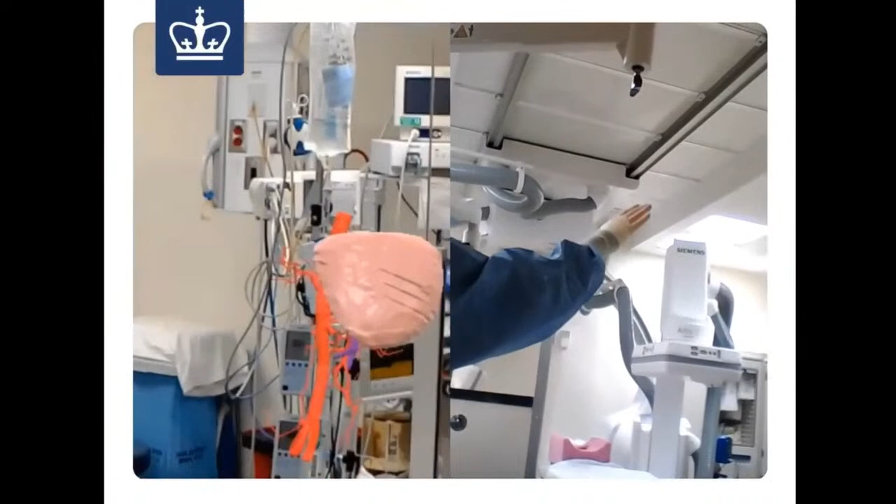Another example is actually something that our CEO Alon created for his thesis project over at Columbia, where he took MRI scans and converted them into 3D models to actually assist with surgery.

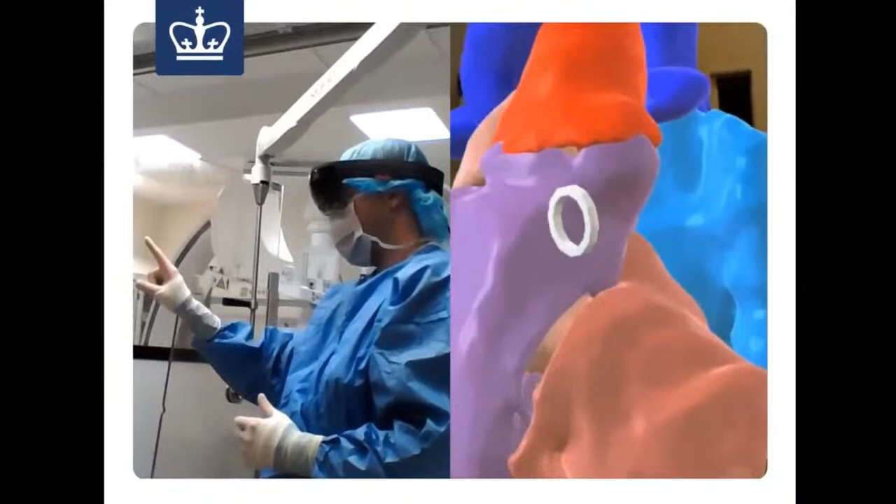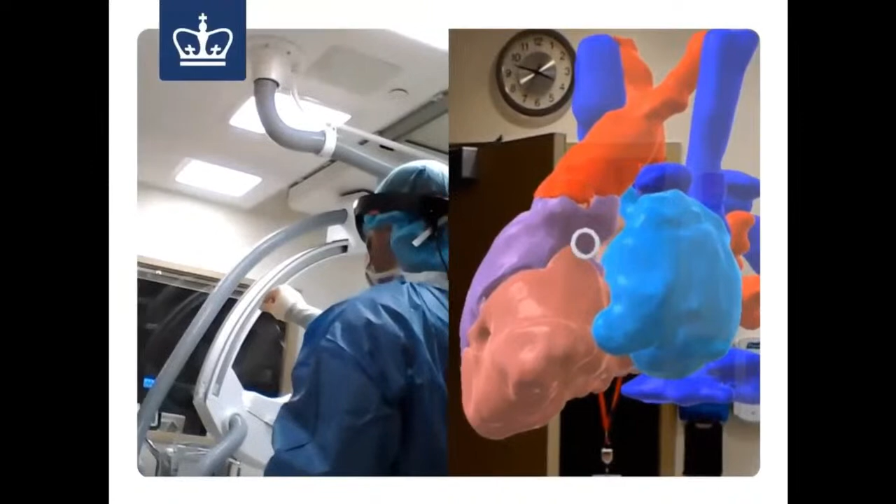The physician would put on the smart glasses, the HoloLens made by Microsoft, and the physician was then able to see the heart floating above the patient and interact with it. The physician was able to get a 3D reference of the patient's anatomy in real time. This is a perfect example of augmented reality being used in a serious industry that could truly save lives.

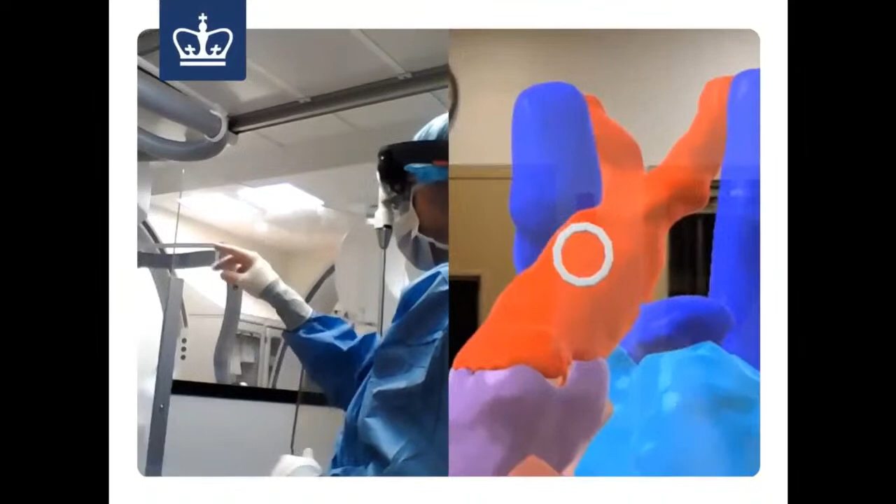So while working on this project, Alon was getting a little bit frustrated at how cumbersome and time-consuming it was to have to get all the scans, upload them, convert them, store them locally, be limited to making changes locally, and so on. All he really wanted to do was just deliver these 3D assets to an AR device remotely in a convenient way that didn't require him to wake up super early to get into the actual facility to get this done.

This inspired Alon to start talking to other people to see if other developers had the same issue, and they ultimately came to the conclusion that it was very difficult to deliver 3D content regardless of what it was, whether it was an AR experience or a VR experience. There really wasn't a way to consolidate everything on a back end in a central place.

With 2D content, there's really no problem. For web, there's Heroku and a few others. For mobile, there's Firebase and Parse, to name a couple, but there's really nothing for immersive. So who's going to build the same cloud platform for the same solution for 3D assets?

Yep, that's right, it is echo3D. We are a cloud platform for 3D applications that provides tools and infrastructure for 3D applications, spatial computing, AR, VR, XR, MR, WebXR, and we support any 3D application, whether it's face filters, NFTs, game assets, or anything for the web. We make it so you can upload any 3D data and let you stream it all around the world to any device. Let's dive into it.

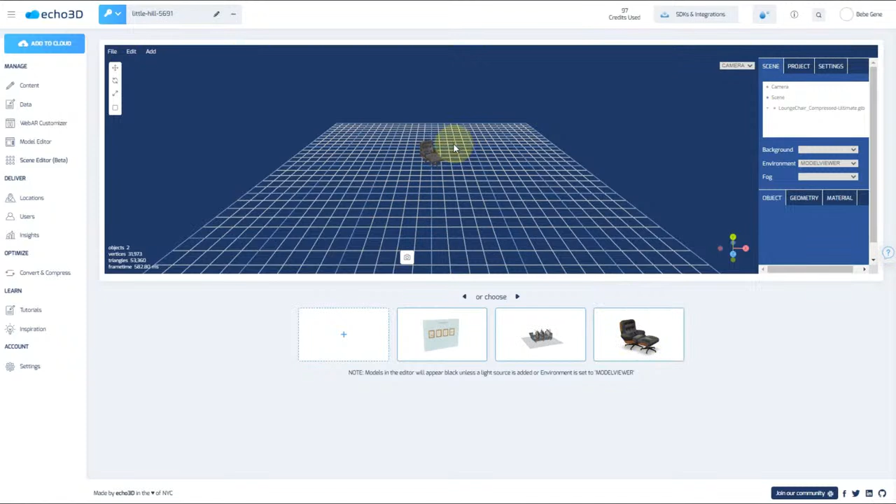And then moving along to Scene Editor, which I think is one of the cooler features that we have. If you click on your asset, it will immediately add it to the scene. Over here, each of these grids is about 1 meter, so you can think of this in terms of scale. Over here, we have the option to create a new scene, which will reset the scene. If you have a larger file or something not yet in the project, you can import it.

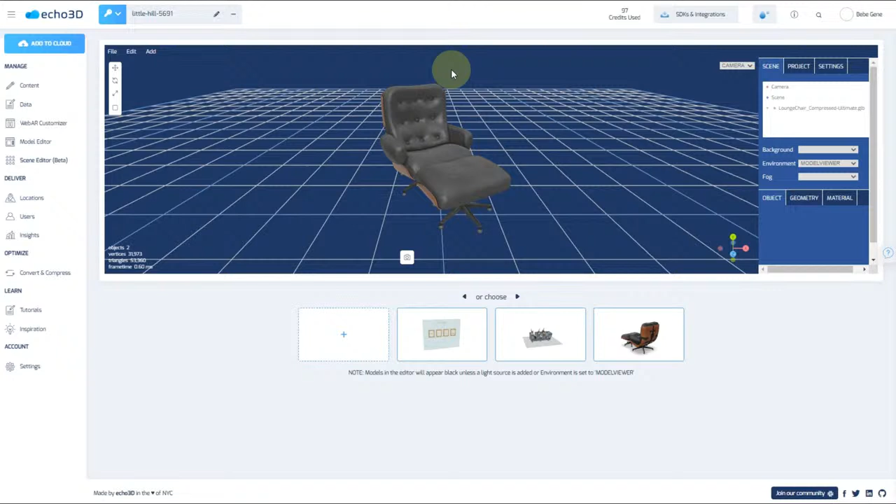And these are your export options. You can export the object as a standalone, you can export the scene. So say, for example, you have a lot of objects that are in the scene and you wanted them to be exported as one object, you could do that with that. You can export the file, or you can again export to console, which will put it back in the content section. And over here, these are your controllers.

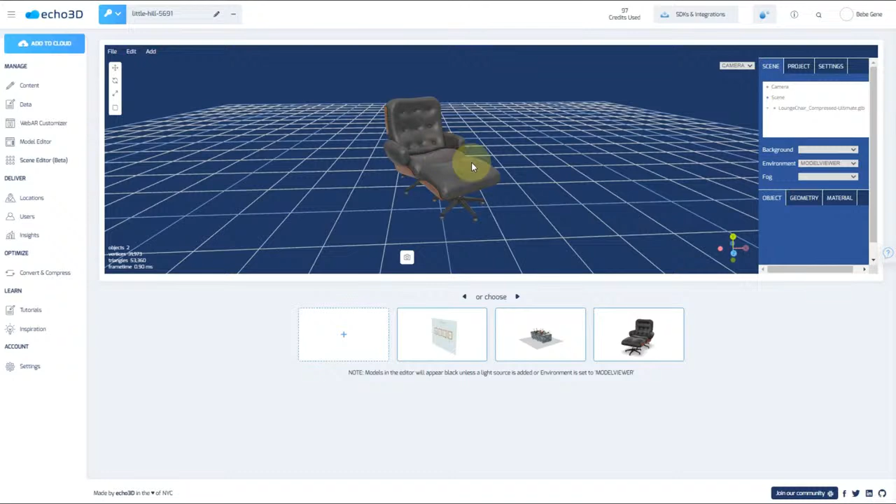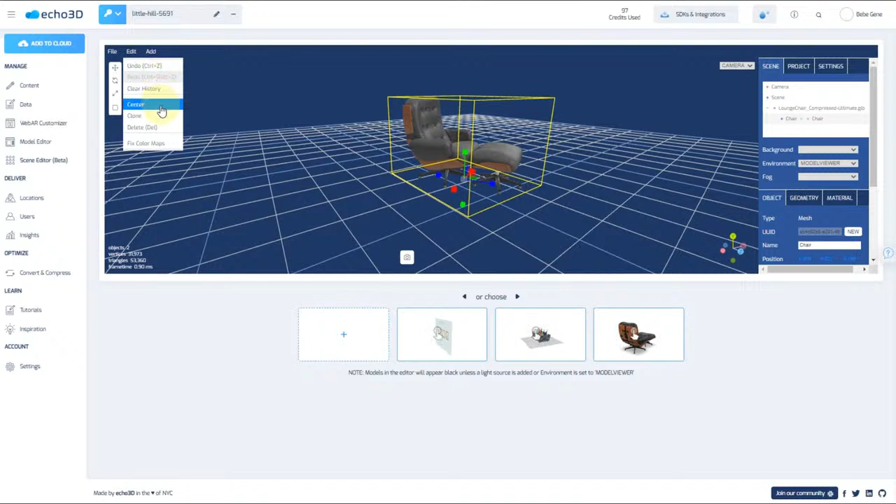So if you wanted to modify anything, you just click on the object, and this will be your directional capabilities. So you have your X, Y, and your Z, and you have the same for the rotation. If you wanted to work on scale, that's a feature as well. And then here under Edit, you're able to make clones, delete, center, clear the history, and fix any color maps.

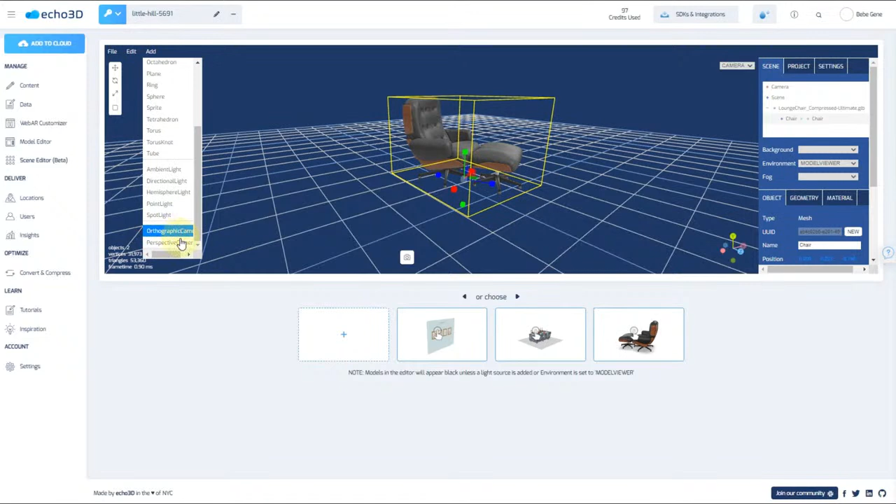And then here, a really nice feature is if you wanted to do a group, so you could create smaller objects within a larger object, and we have tons of primitive shapes that you can pick from as well. We also have different lighting that you can add and different types of perspective cameras. So let's add a box, for example, just like in Unity, where you can add a basic object.

Echo 3D is also fantastic for enterprise level 3D asset management. We have a few features that have been requested by our other enterprise clients that actually make a lot of great sense, so let me show you some of them.

So the first one is version control for 3D asset management. If you click on the content card and go over here to versions, you can actually see a history of the changes made to the 3D model. So anytime you need to roll back, you're able to do so right here in the console.

Another feature we have is adding annotations to each of these content cards. So say, for example, you're working on a project, post tomorrow, edit this, change this, resize this, change rotation. All the notes can be added here and saved, so whoever you're collaborating with can get your notes in real time and everybody's on the same page.

Another useful feature is adding collaborators and setting their permissions levels. If you go over to the security section, you'll see under user settings that you're able to add different people and modify their permission levels. So if you wanted to make them just a user, viewer, or admin, you have total control over that. Try them out and let us know what you think.

Under the deliver section, we have all of the locations, anything to do with the servers really. And for your users, we'll show them the distribution and where they're all engaging from with your content.

Under Insights, we give you quite a bit of information. Over here, you can keep an eye on all the credits used with your API calls, anything for storage, bandwidth, usage over the past several days. You can pick whatever timeline you want to use.

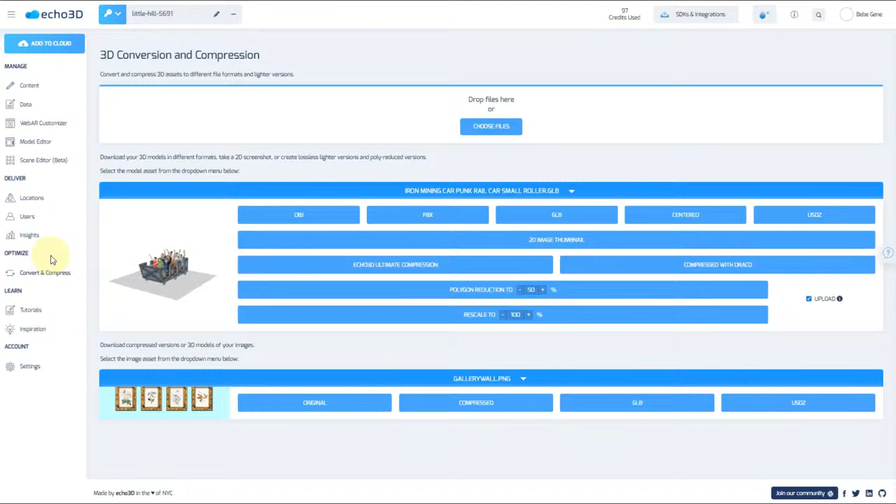Now, if we go under the optimize section where it says convert and compress, this is a really fantastic section to work with. Here we have the opportunity to convert our model into different formats. Typically this is something you would have to do in Blender or use a free converter online, which there aren't too many great ones. So we welcome you to try this out.

So if we pull up this chair, this is actually a very high resolution model that we've pushed through Ultimate Compression, and I'll show you how to use that. But first, I just want to walk you through this very quickly.

So you upload your file here, whatever it is that you want to do. Once that gets uploaded, you can convert it to whatever options are available based on that type of model. You can center the model, run it through Ultimate Compression, compress with Draco as well. If you wanted to do polygon reduction, that would make the change for you, and you're able to change the scale. Alternatively, if you have images, which is what one of the other assets is, you have some options to make changes here as well. By default, anytime you upload an image to Echo 3D, it turns it into a 3D object.

Okay, let me show you how Ultimate Compression works. In this video, I'm going to show you how to use the Ultimate Compression tool, which can compress your file sizes up to 100x.

Whether you want to upload your own model, which you can do by clicking on Add to Cloud or clicking on this empty content card and choosing your file, or uploading it from Google Drive, or picking one of our many 75,000 plus models, we'll choose the magnifying glass model.